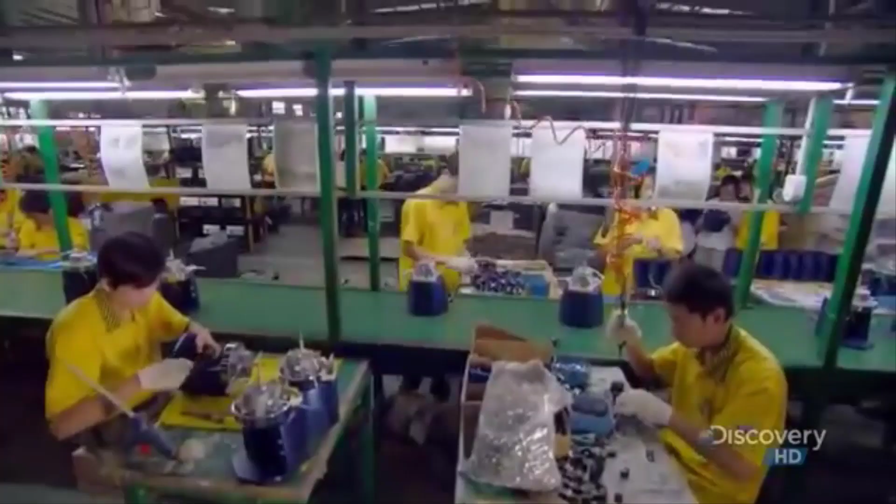World population has been on the rise for the past century and continues to do so. With the increase in numbers, the demand on products increases as well. This increase in demand forced factories and producers to find means of enhancing, enlarging, and fastening the product production rate using any means necessary, and especially the advancement of technology.

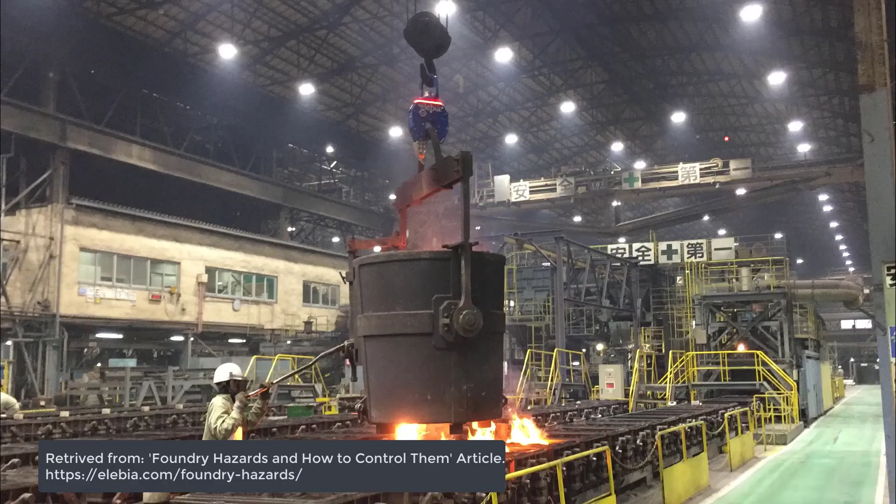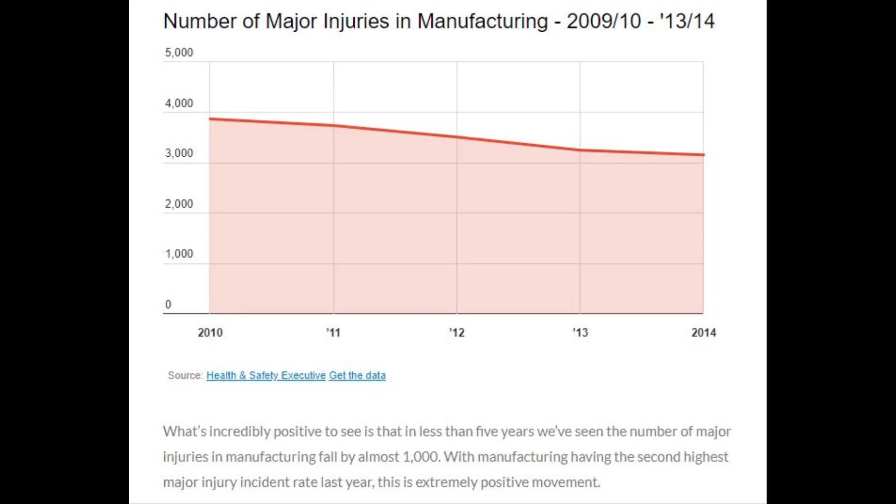While the aim towards the use of robots is to increase work rate, amplify efficiency, and reduce the risk on workers, human-robot collaboration is yet to reach a point to nullify work-related accidents. Locations such as nuclear power plants, ceramic factories, and vehicle painting booths impose a significant safety and health issue for any operator in their work area.

Situations like these guide our proposed solution towards a certain criterion, a criterion in which operations performed over a distance is necessary. Our solution to the problem revolves around the use of teleoperation alongside virtual reality to place the operators in a safe simulated work environment. Additionally, AI will be used to implement the self-aware technique on controlled robots. The integration of tele-operated control through virtual reality with AI may lead to an increase in human-robot collaboration significantly.

Our proposed solution can be applied on different types and sizes of robots. The system depends on new technologies, and more importantly, it guarantees safety for workers, and it's easy to use as its operation requires no intense experience. Hence, it aims to increase functionality and productivity of industrial workplaces. This makes our solution simple and applicable in different work fields.

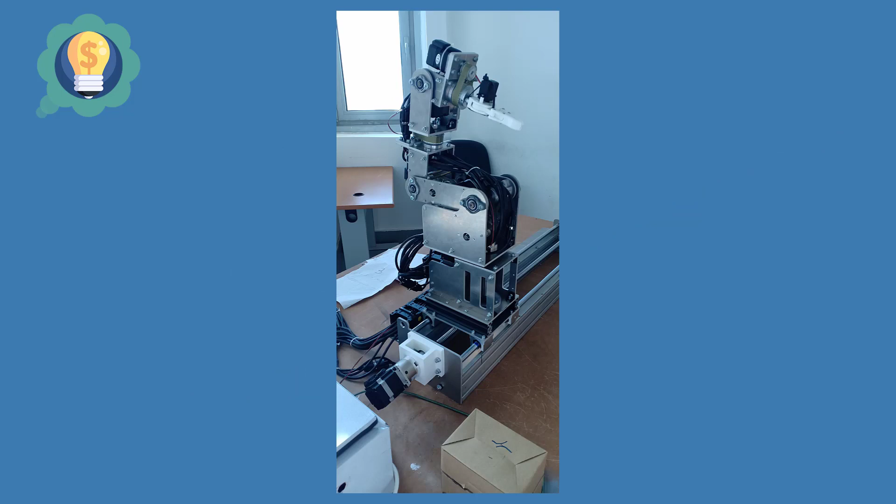Our solution is demonstrated on a customized 7 degrees of freedom serial robotic arm. The robot model resembles robotic arms operating in different industrial fields, doing tasks like welding and assembling. The robot, in our case, consists of 6 revolute joints mounted on a prismatic joint, all actuated by stepper motors to increase the workspace of the whole arm and to imitate pick-and-place tasks.

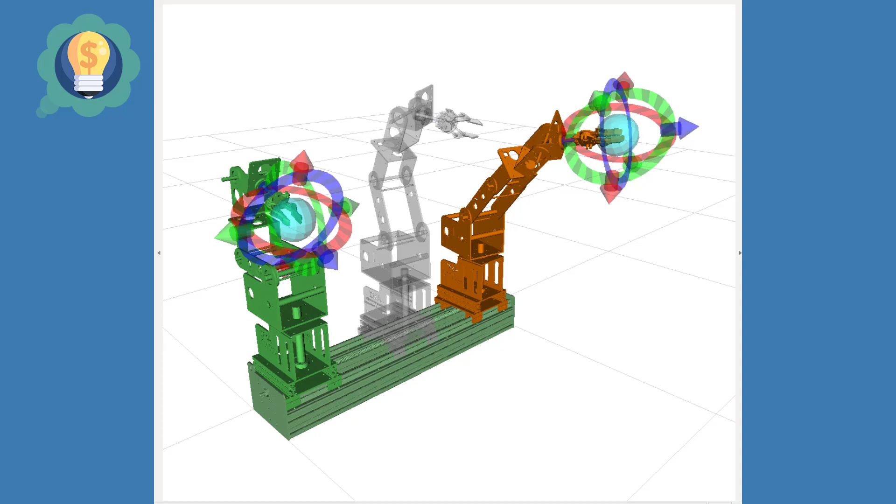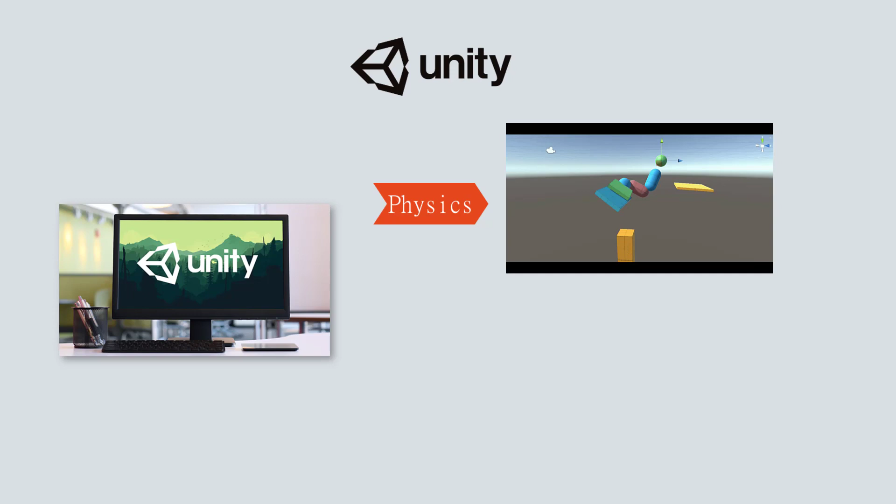To apply the solution, 2 platforms were used, Unity 3D and ROS. Unity 3D is a free-to-use game engine. Unity was selected due to its strong physics simulation abilities, ease of use, and ease of VR accessibility. Moreover, Unity gives the ability to build a custom environment, thus giving a very flexible user interface.

On the other hand, ROS, or Robot Operating System, is an open source middleware specifically customized for working with all different kinds of robots. ROS is used because it allows for the communication between different software, all the while giving functional implementations to the system.

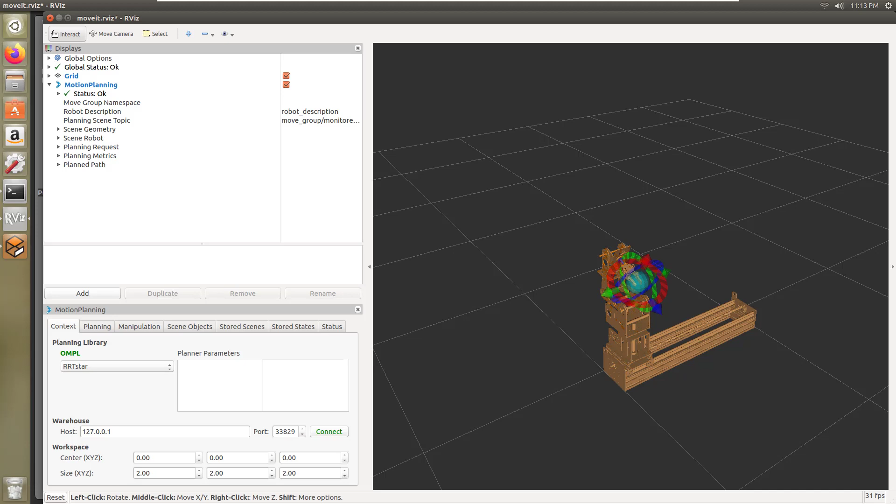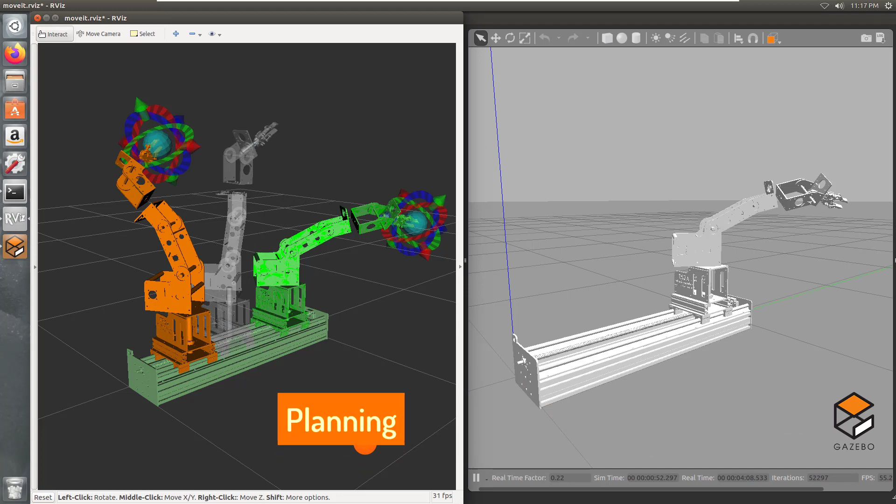In order to visualize the robot in ROS platform, the model is imported in RViz visualization tool. From there, motion planning and execution of any desired positions can be carried out. In the meantime, the trajectory motion is displayed on a simulated real-world environment using Gazebo Dynamic 3D engine. Finally, the data of the joint angles and positions are easily monitored and can be transferred to other connected ROS nodes for further calculations.

Differing from ROS, Unity being a game engine makes the whole software a strong visualization tool. The main aspect of visualization in Unity is the created environment. The environment in Unity is called the scene. The scene is highly adjustable and easily changed, giving a very flexible user interface and diversifies the user experience.

To have convincing physical behavior, Unity's built-in physics engines provide components that handle the physical simulation. With just a few parameter settings, we can create objects that behave passively in a realistic way. Unity gives us the power to create truly immersive, cutting-edge AR and VR applications. The headset used is the Oculus Rift S. It was preferred over other headsets due to its easy setup and flexible inside-out tracking.

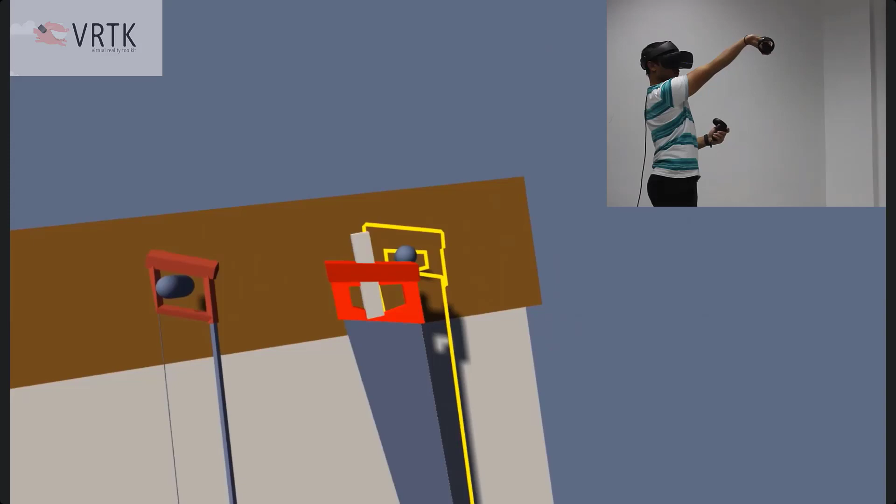To be able to use the full power of VR integration, VR Toolkit is introduced. VRTK is an open source package that provides the ability to interact and move in the environment, giving us a much easier way to implement our solutions.

Now that our two main platforms, Unity 3D and ROS, are set up, we need to be able to communicate between them. To tackle this objective, ROS Sharp is used. ROS Sharp is a set of open source libraries written using C# scripts to enable communication between platforms such as Unity with ROS using WebSocket communication protocol. Using a URDF parser supplied by ROS Sharp, the model is imported from ROS to Unity.

C# scripts in Unity are used to send the required end position of the robotic arm to ROS for calculations to occur. The inverse kinematics for the required position is solved, then the angles acquired of each joint are sent back to Unity by using ROS Sharp supplied libraries. The joint angles are then transmitted towards the hardware.

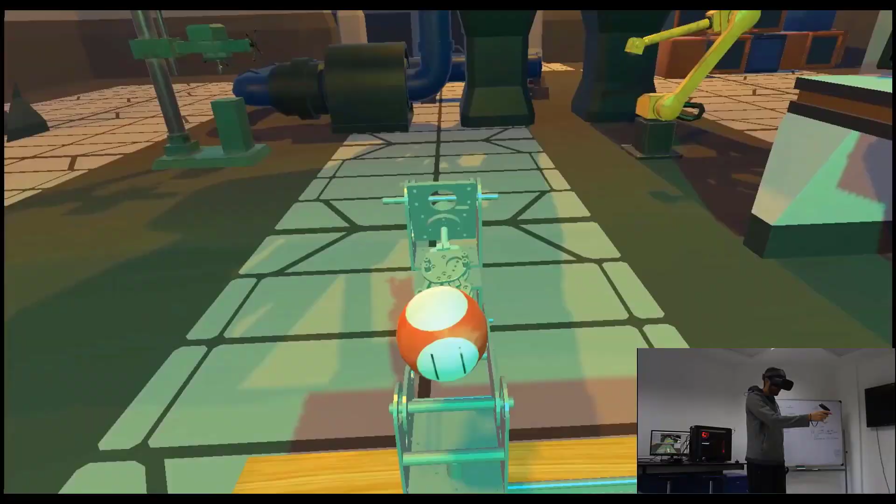To demonstrate the system, the user grabs the sphere representing the required goal position. When the user lets go of the sphere, the values of the position and orientation are sent to ROS via ROS Bridge, a ROS Sharp library.

Inverse kinematics are solved for the position, and then the acquired motion is executed on RViz. The motion executed on RViz is then transferred to Unity. Unity then performs the same motion but takes into consideration physical attributes of the robot and the environment.

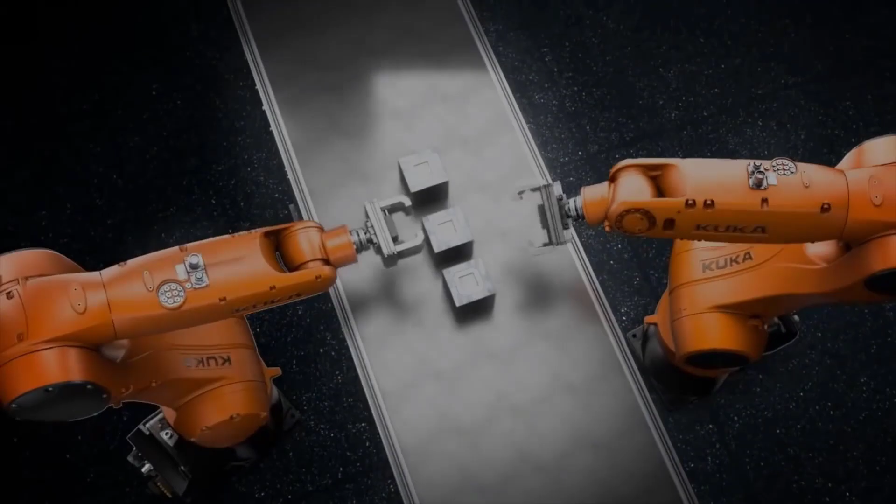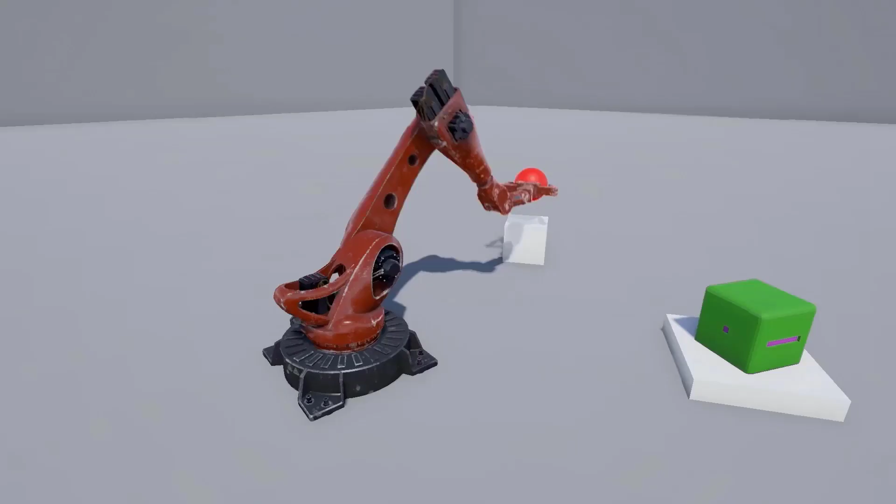In our project, we are using artificial intelligence to control our robotic arm and make it smarter, as an AI solution will lead to increased control, resilience, quality, and time reduction. Our aim here is to enable the robotic arm we are working on to create a self-image of itself, so that it can do three important and crucial tasks: adapting to different situations, handling new tasks, and finally detecting and adapting to physical damage or mechanical issues.

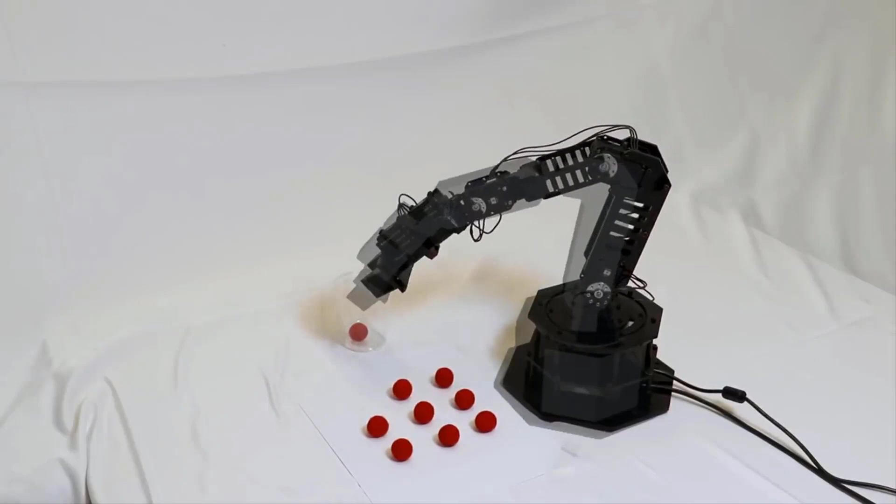But how can the robot become self-aware? Let's take this example from engineers at Columbia University in New York, who used the process of self-simulation to give a 4 degrees of freedom robotic arm the ability to imagine itself. Via trial and error, the robot babbles, collecting action-sensation pairs and abstracting a model. Visualizing that model, different tasks like writing can be performed.

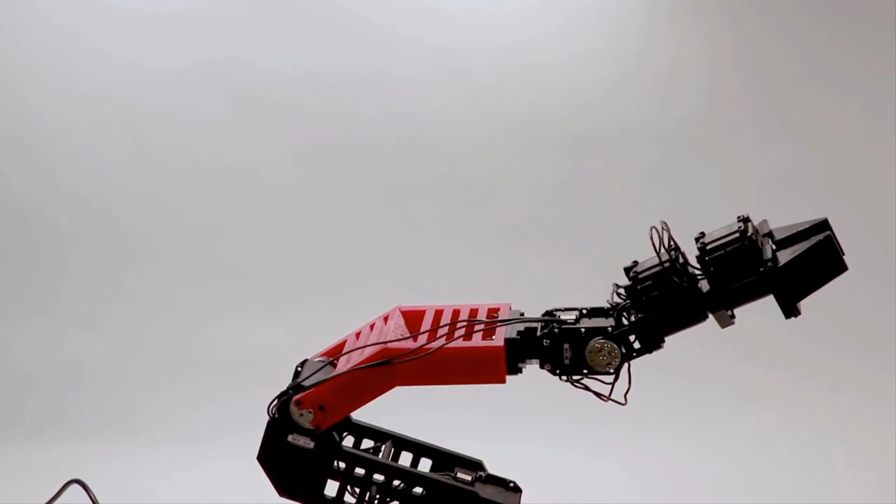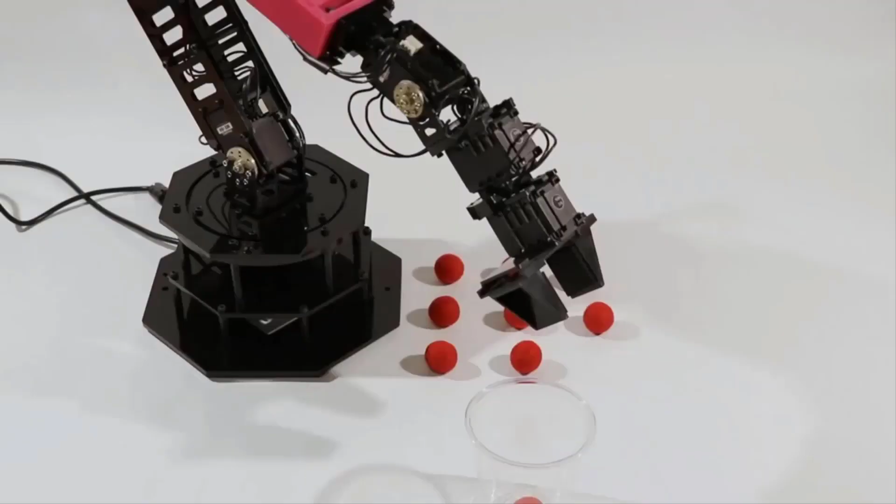Not only that, but it will also detect any deformations that occur in its body and adapt a new model to the change. This self-aware technique is something that we are striving for with our 7 degrees of freedom manipulator, to be able to adapt to any damage or change in the surrounding environment with zero prior knowledge of physics, geometry, or motor dynamics. Therefore, we focused on developing and creating much simpler AI systems like a simple neural network.

The goal of the deep neural network in our problem is to predict the joint angles that will achieve the desired pose of the end effector without any mathematical calculations. This problem is known as the inverse kinematics problem, and it is one of the main challenges in robotics control.

In this stage, we have collected our training data from the simulation, but later the data will be collected from the hardware. In order to do that, we generated the workspace using forward kinematics. And by doing so, we were able to generate 680,000 training samples. Each one consists of positions x, y, z and the orientation theta, phi, psi of the end effector with respect to the home position.

Afterwards, we built our first deep neural network architecture, and then we performed the training process and noted the results. The accuracy of the first architecture was 53%, and then we optimized many parameters like number of layers, number of neurons, and learning rate. After doing these optimization procedures, the accuracy of the neural network reached 92.6%.